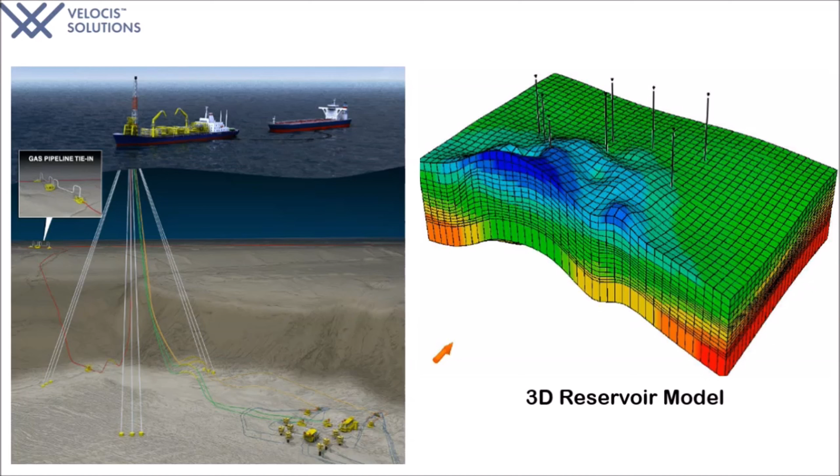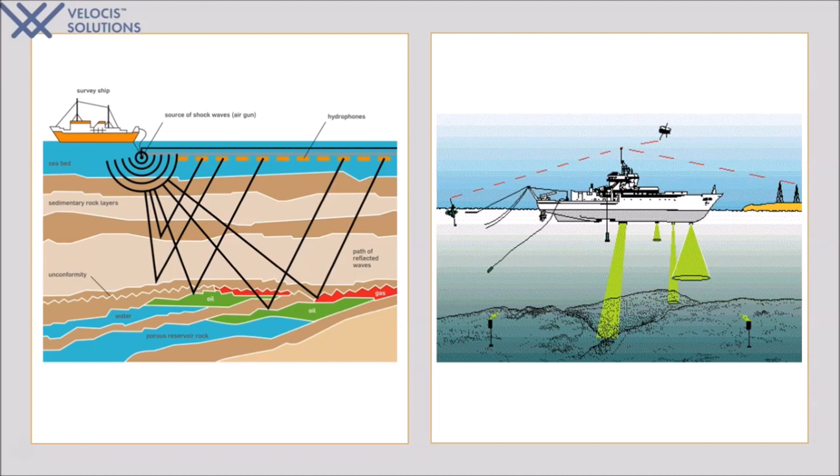As favorable results were obtained from the geological survey, the company hired a semi-submersible drilling rig to drill exploration wells. The geophysicists record the seismic waves to learn about oil and gas reservoirs located below the surface. The discovery drilling works were carried out in 3 different areas within the South China Sea close to Sabah State between 2010 and 2011. After a month of exploration, the exact location of new drilling wells was decided.

These wells were drilled by using a drilling rig, and after the wells proved to be able to produce hydrocarbons as expected, Sabah Operating Company continued the drilling activities in the field before constructing and placing a permanent production platform. There were already 2 other gas production platforms in the discovered oil field. Therefore, the composition of the hydrocarbon reservoir is well understood.

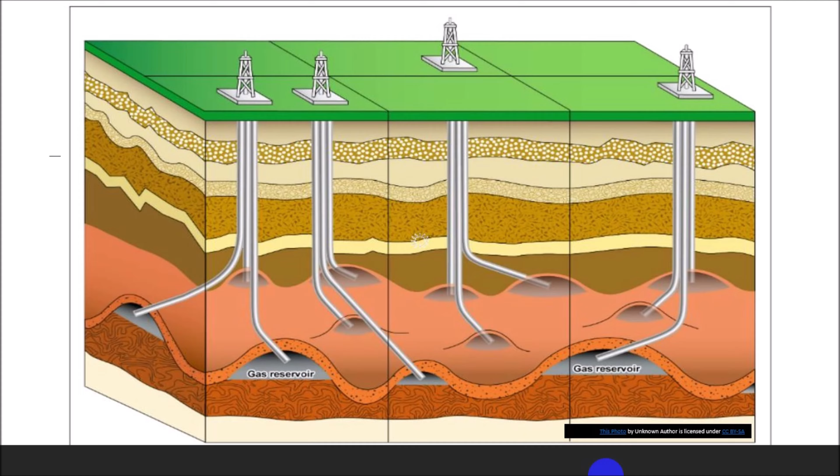Well, let's talk about the reservoir conditions. The reservoir conditions are beyond the scope of chemical engineers, but it's worth learning some information about the conditions of our main reservoirs, Ardabil and Karabakh. Generally, reservoir conditions are different and specific to each reservoir. 2 dominant variable conditions affect every petroleum reservoir: pressure and temperature.

The differences in fluid pressure and temperature between one area and another determine the pressure and temperature gradients, which are fundamental to most problems involving the movement of oil and gas through the rocks. This movement may be a migration that permits oil and gas to accumulate to form a pool, or it may be a movement of oil and gas from a pool into a wellbore. Much of petroleum engineering has to do with relations between pressure, volume and temperature, or as they are commonly called collectively, PVT.

The volume changes are most pronounced in gas content of the reservoir, but they also occur in other fluids, the water and the oil, and to a lesser extent in materials that constitute reservoir rock. Abnormal fluid pressure gradients and any temperature gradients indicate that energy has changed from potential to kinetic, and that work

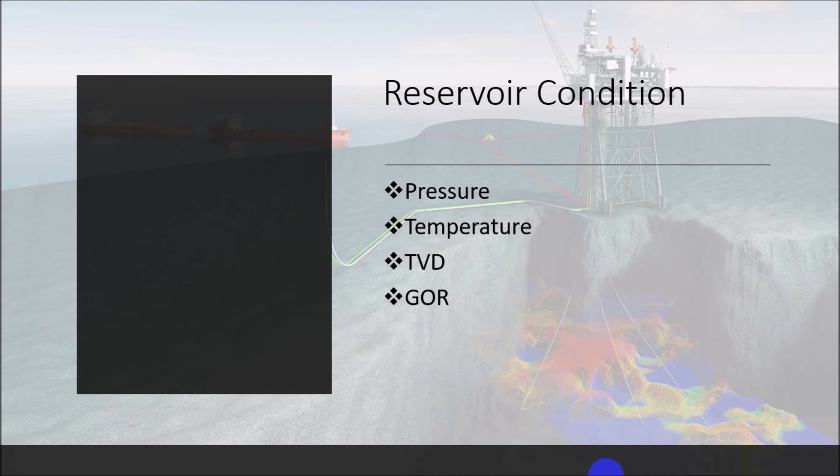is being done. Apart from the pressure and temperature of the reservoir, TVD, which is true vertical depth, and GOR, that is gas to oil ratio, are also parameters used while defining the reservoir conditions. True vertical depth is the parameter that is defined by measuring vertically from surface down to a certain target downhole. The gas to oil ratio is the ratio of the volume of gas that comes out of the solution to the volume of oil at the standard conditions.

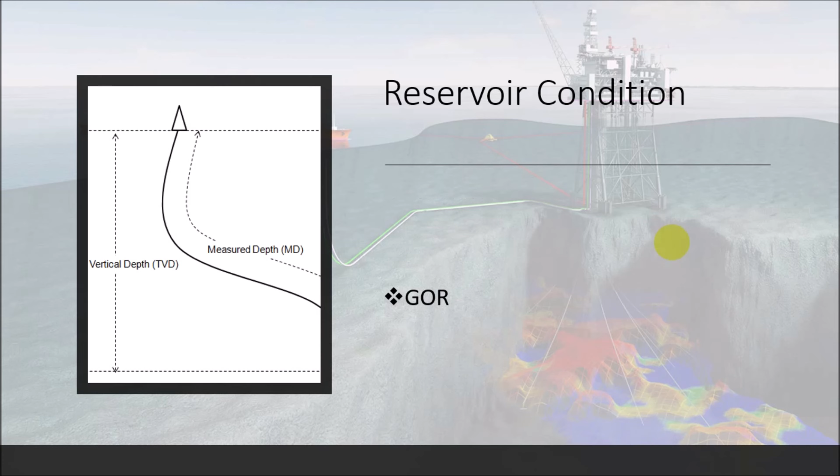As we define all the required parameters for defining reservoir conditions, let's look at the conditions of our reservoirs. As you can see from the table, our Ardabil III reservoir operates at 251 bar and 60 degrees Celsius with 1250 gas to oil ratio and from 2300 meters vertically below the surface. You can also analyze the conditions of our other reservoirs from the table provided. Please note that all above GORs are nominal figures that are conservative design basis. The GOR will vary throughout the field life.

Alright, let's summarize what we have learned in this lesson. First, we talked about the significance and formation of the reservoir fluids, and then discussed the parameters like TVD, GOR, pressure and temperature that are needed to characterize the reservoir conditions. Well, I hope you found out how mysterious the reservoirs are.

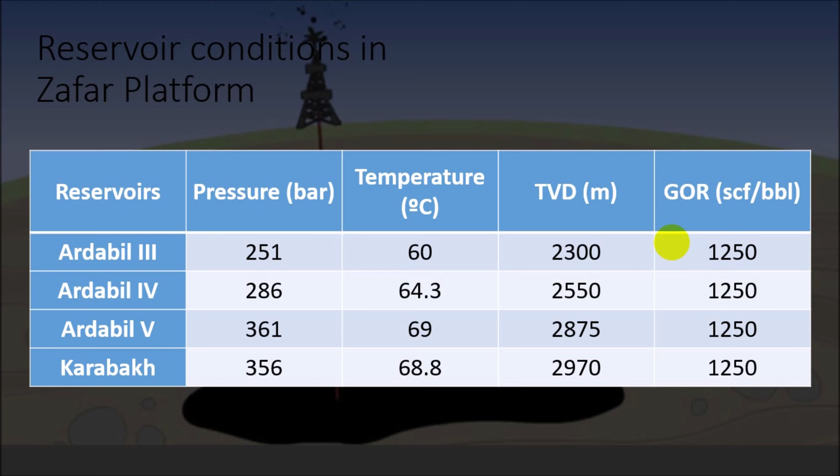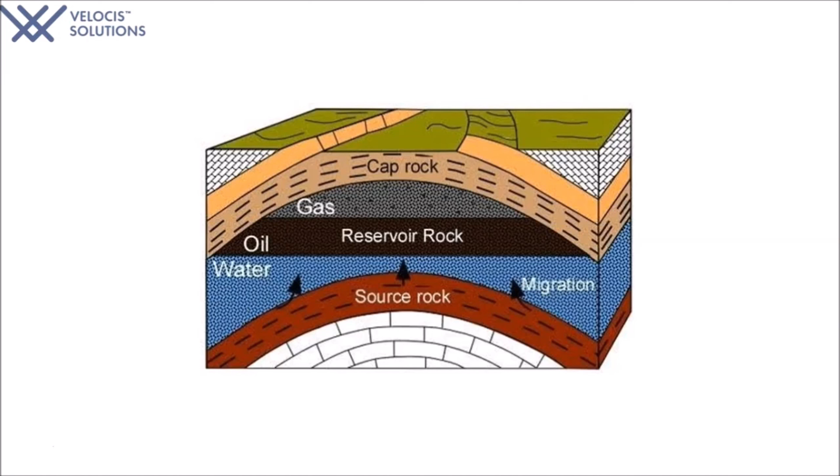An oil and gas reservoir is a formation of rock in which oil and natural gas has accumulated. Conventional hydrocarbon reservoirs consist of three main parts: the source rock, the reservoir rock, and the cap rock. The source rock is the rock that contains the carbon that the oil and gas forms from. The reservoir rock is the porous permeable rock layer or layers that hold oil and gas. Then the cap rock seals the top and the sides so that hydrocarbons are trapped in the reservoir while water

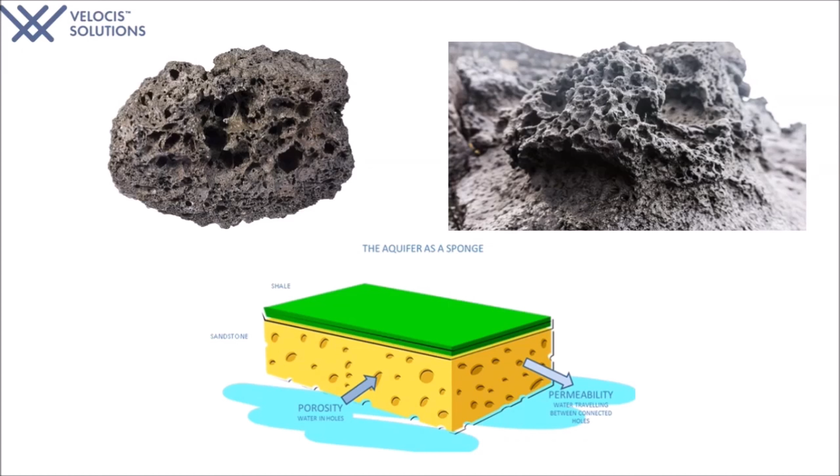often seals the bottom. Reservoir rocks need to be both porous and permeable, and this means that there are small pockets of space within the rock where oil and gas can settle, and small channel connections allow oil or gas to flow out of this rock easily when it's drilled. These spaces between the grains can develop as the formation of rock occurs or afterwards, usually as a result of groundwater passing through the rock and dissolving some of the cement between the sediment grains.

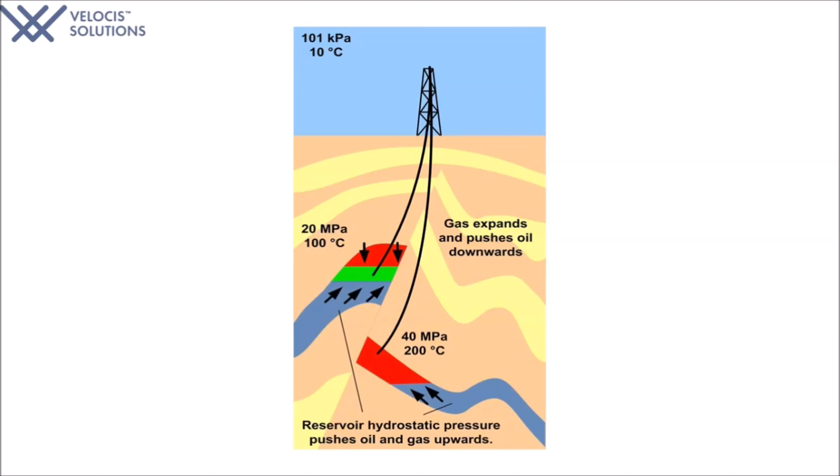The oil and gas is pressurized in the pores of the absorbent formation rock. When a well is drilled into the reservoir structure, the hydrostatic formation pressure drives the hydrocarbons out of the rock and up into the well. Gas, oil, and water are extracted and levels shift as the reservoir is depleted. The seismic data and advanced 3D visualization models are used to plan the extraction.

When 3D seismic investigation has been completed, it is time to drill the well. Normally, dedicated drilling rigs, either mobile onshore units or offshore floating rigs, are used here. Larger production platforms may also have their own production drilling equipment.

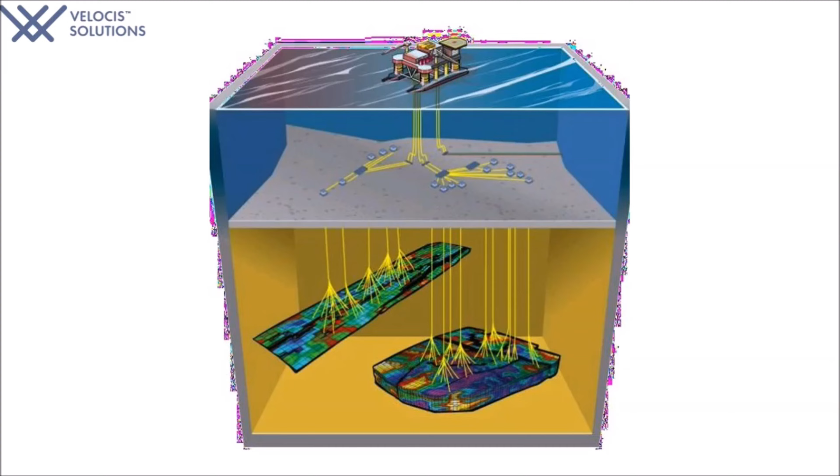You may have noticed the term upstream in the objective section. If you are going to work in the oil and gas industry, you will hear this and a couple of words like those almost every day. The terms upstream, midstream, and downstream are used to mark three main segments in the oil and gas supply chain. Now, let's start defining with upstream processes.

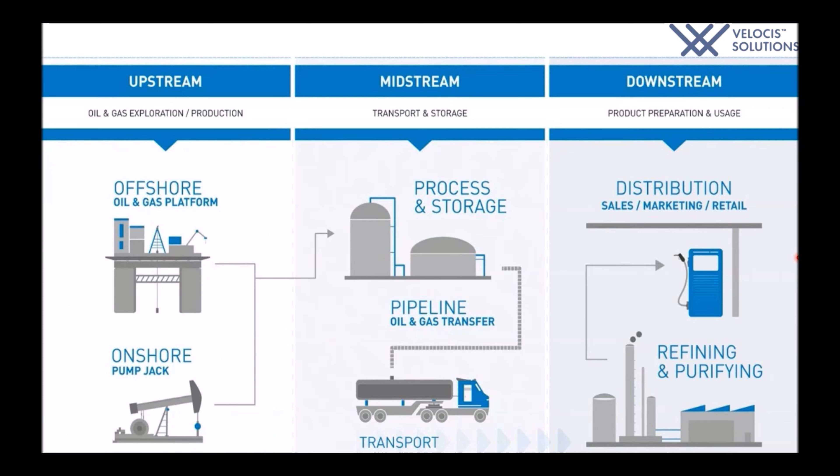Generally, upstream processes can be simply defined as the set of processes and activities needed to locate and extract the materials for production. To be more specific, in the oil and gas industry, the upstream process refers to activities like exploration of the reservoirs, drilling wells, and extraction and even initial production of oil and gas from the deposits.

Oil and gas that comes to the surface goes through several physical processes like separation to prepare material for export and compression in order to reach required export pressure. After that, the next part of the oil and gas supply chain commences, that is midstream.

This segment refers to anything that is required to transport and store crude oil and natural gas before they are refined and processed into fuels and key elements needed to make different products that we use every day. The midstream includes pipelines and all the infrastructure needed to move these over long distances, such as pumping stations, tank trucks, rail tankers, and transcontinental tankers. However, it is mostly referred to as a bridge between upstream and downstream processes.

And finally, the downstream processes include a set of activities like processing, distribution, and sale of the product. Oil refineries are a good example of downstream operations, where a set of physical and chemical processes are carried out for converting the crude oil into ready-for-sale products.

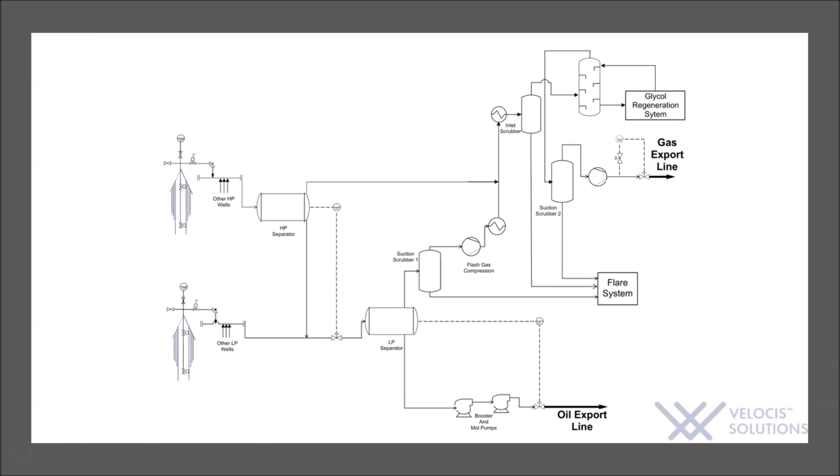Let's start. Developing the complete flow diagram of any platform system requires an enormous amount of work and true data. Therefore, most process engineers spend hours and hours to gather all of the required values and then in the end generate a full system after millions of updates. Well, on the whole, the platforms comprise mainly separators and pressure-creating devices.

In our Zephyr platform, two-phase mixtures from LP, low pressure, and HP, high pressure, manifolds enter the corresponding separators in order to separate the liquid and gas parts of the mixture from each other. To be more precise, the mixture entering the HP separator working at 40 degrees Celsius and 2901 kPa is processed under high pressure conditions. And then the pressurized liquid from the bottom part of the column comes into the LP separator working at 35 degrees Celsius and 1401 kPa.

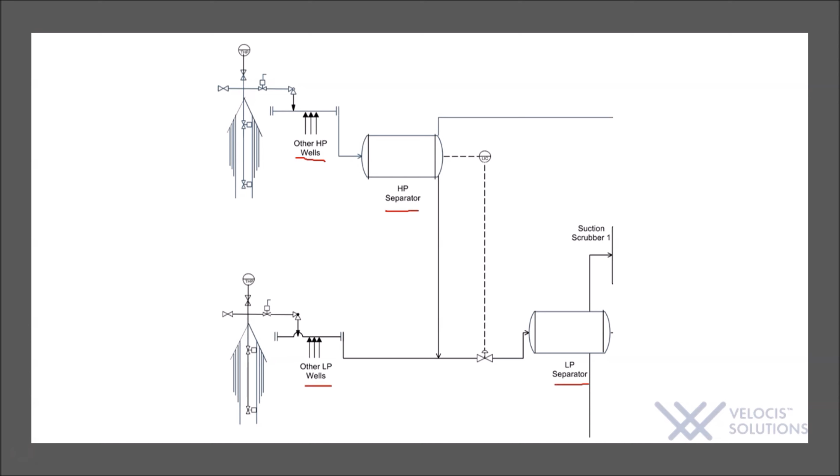Moreover, the bottom product of this column is the liquid, which needs to be transported onshore for further processes or for direct sale. As the distance between the offshore platform and the onshore terminal is huge, the liquid needs to have a certain level of pressure to overcome the sum of pressure losses on the way and the pressure at the entering point. This pressure is generated with the help of two consecutive pumps.

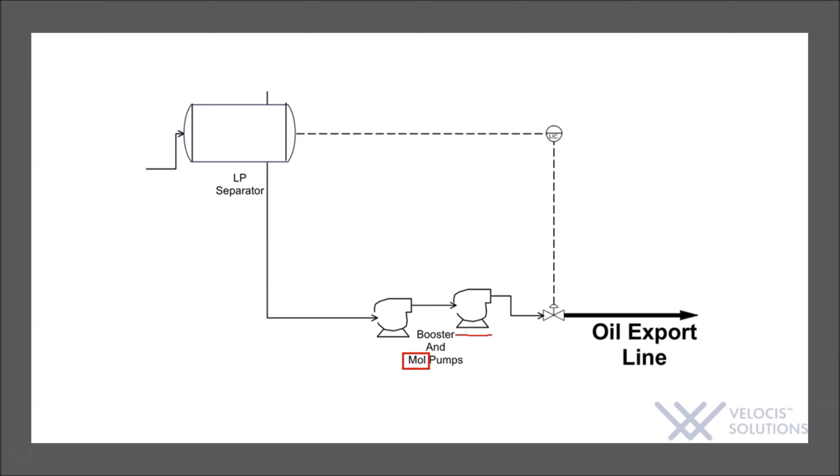The first pump, the booster pump, which is slightly smaller, serves for increasing the pressure of the liquid to the determined mid-pressure value of 2800 kPa right before the entrance of the main pump. This pressure increase is specially determined through several steps of calculation and aims to prevent the formation of cavitation, meaning the high pressure collapse of bubbles formed due to the boiling of the mixture at low pressures in the pump. And after that, the second pump, or the main oil line pump, increases the pressure of the export fluid to 6601 kPa, which is quite enough for the liquid to reach the onshore terminal.

At the same time, the vapor leaving from the top of the column gets into suction scrubber 1, which removes all of the considerable liquid particles from the vapor before entering the flash gas compressor. The compressor, whose main purpose is to bring the vapor to the same pressure as the vapor leaving from the top of the HP separator, increases the pressure of the vapor from 1401 kPa to 3101 kPa. However, immediately after going out of the compressor, the vapor enters the cooler to give its excess heat away prior to joining the HP vapor.

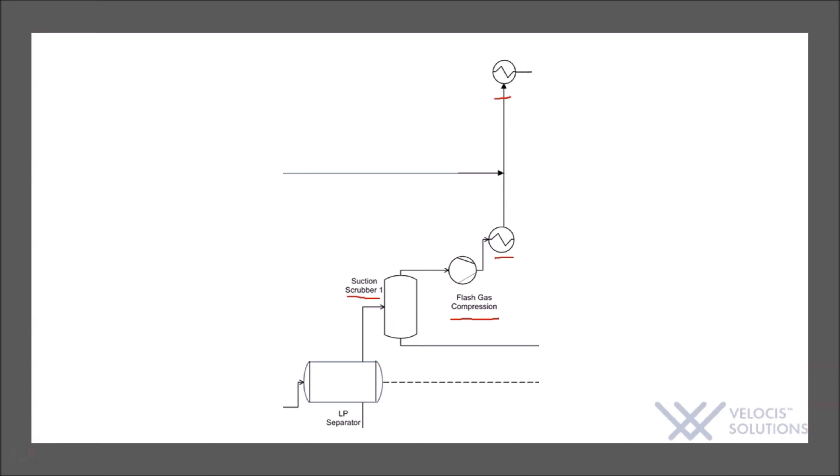Once these vapors are mixed, they once again get into the cooler for further removal of heat to 16.12 degrees Celsius. Unfortunately, all of the cooling results in the creation of liquid particles inside the mixture, and these are removed in the inlet scrubber of the glycol contactor, where the components which cause the formation of hydrates are separated from the mixture with the help of glycols. This system takes advantage of a glycol regeneration system, where the glycol mixture used in the system is regenerated.

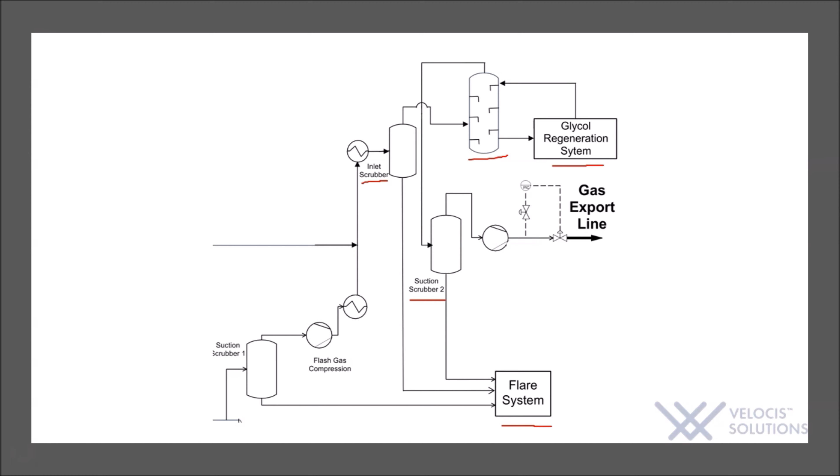Subsequently, the hydrocarbon fluid which gets out of the contactor enters the second suction scrubber, which removes the liquid particles, and these are then mixed with scrubbed liquids from the first inlet scrubber. After that, this whole mixture is dispatched to the flare system, and simultaneously the vapor of the second scrubber is transferred to the gas export compression, where its pressure gets increased to 7101 kPa. And as a final stage, the vapor is moved onshore through the export pipelines.